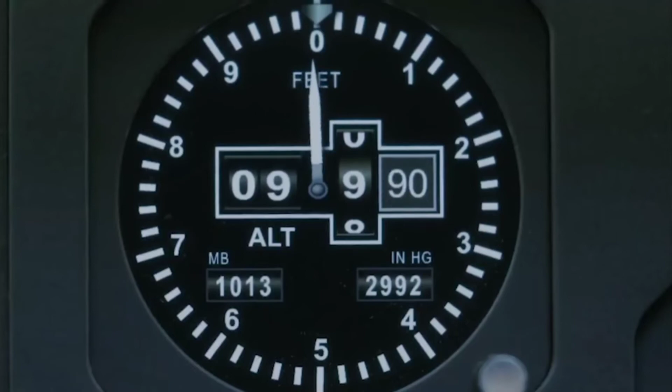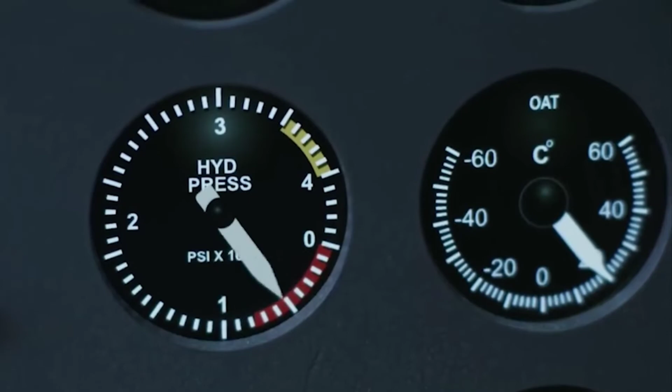Plane has been in the air for 12 minutes. What? What is it? Looks like we lost hydraulics. Dorval approach, this is Propa 420. We've had dual hydraulic failure. Request clearance to return to Dorval.

An incident is an unplanned event that disrupts routine operation in the context of occupational safety and health. An unforeseen, undesirable event that adversely affects the execution of a work, according to OSHA. The severity of the incident varies from near misses to fatalities.

Hydraulic failure is a serious problem because of the impact that it can cause, which is very devastating. The consequences can be exceedingly costly as well as inflict long-term damage and even inflict injury and, at the worst, death. So, it is important to diagnose hydraulic failure in order to determine whether corrective or other actions are required.

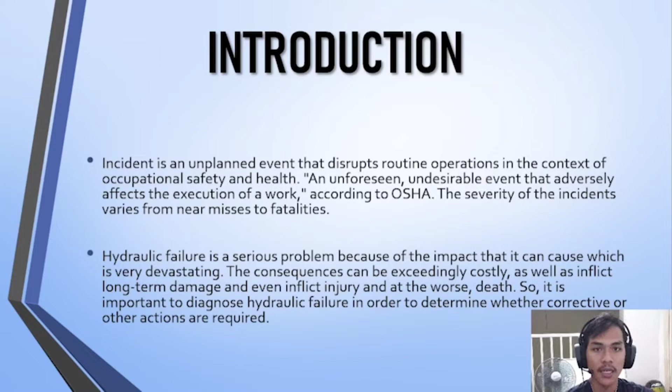Today, I will present about the background of the incident. On 3 May 2020, an Airbus AS350 helicopter N1 WT made an emergency landing at Airglades Airport 2IS. The pilot, the only occupant on board, reported an in-flight hydraulic anomaly and declared an emergency. The pilot subsequently landed at 2IS. The pilot reported no injuries and the helicopter was not substantially damaged.

The flight was conducted under the provisions of Title 14 Code of Federal Regulations Part 91, which began at Fort Lauderdale Executive Airport, FXE, landed at Palm Beach County Park Airport, LNA, and subsequently departed LNA for 2IS.

According to the pilot's written statement of the incident to the Federal Aviation Administration, he reported that upon entering the left downwind for runway 13 at 2IS, the pedals felt rock hard and the HYD2 and SERVO caution lights illuminated on the caution and warning panel. So before I continue explaining the background of the accident, let's explain the meaning of HYD2 and HYD1.

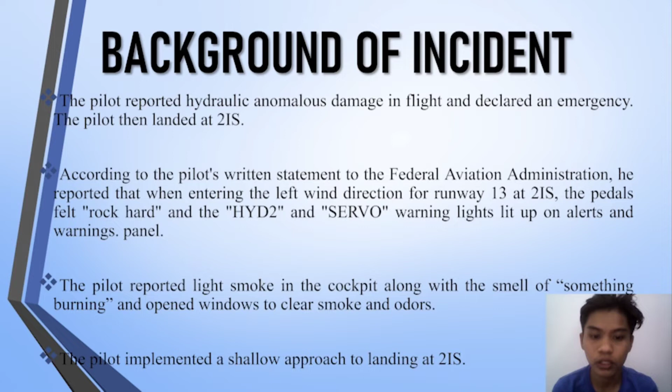So let me continue about the background of the accident. The pilot reported light smoke in the cockpit along with an odor of something burnt and opened the window to clear the smoke and odor. The pilot executed a shallow approach to a run-on landing at 2IS.

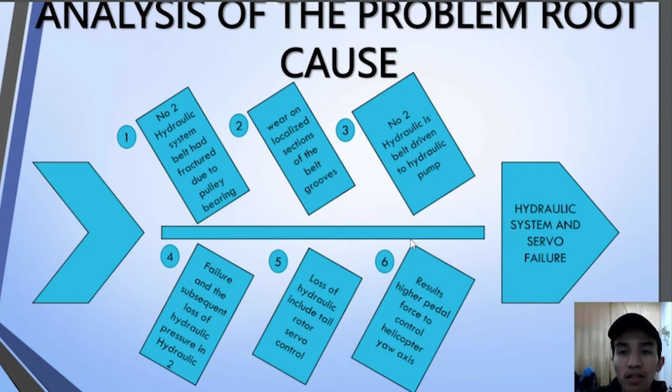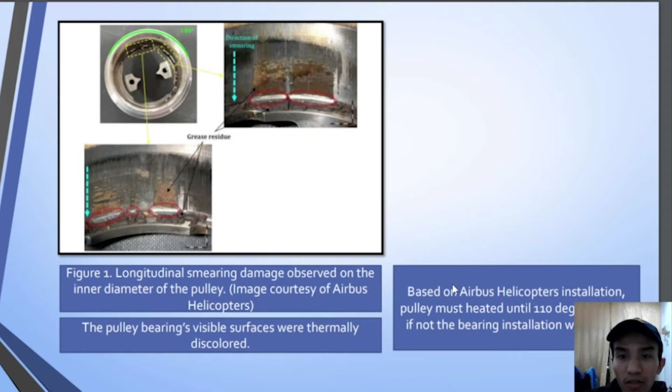Now I'm going to present to you the discussion of this case study. So, the potential problems that might occur. The first one is particulate contamination. Dust, dirt, and debris, such as metal debris, will enter the hydraulic system when the system is not sealed properly. As a result, particulate contamination occurs.

And we know that there is a filter inside every hydraulic system. The function of this filter is to remove the contamination. The filtration of the hydraulic system is critical, so proper filter change intervals and professional procedures are needed to ensure the functionality of the hydraulic system. Particulate contamination can score precision machine parts in the system, and this may lead to the failure of the hydraulic system.

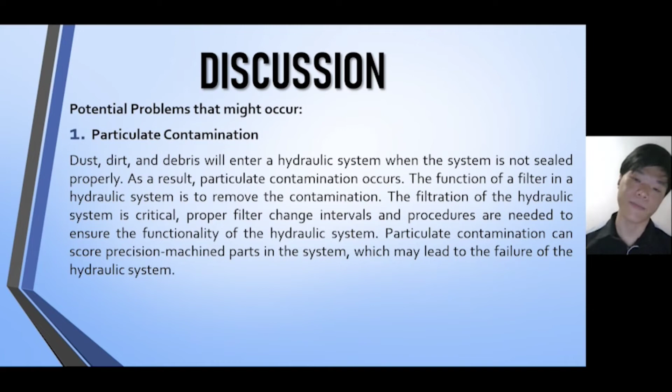The second problem is water contamination. We know that the hydraulic fluid in the hydraulic system plays an important role. When the hydraulic fluid has a milky appearance, it is an indicator of water contamination. Water can enter the hydraulic system when the system is not sealed properly.

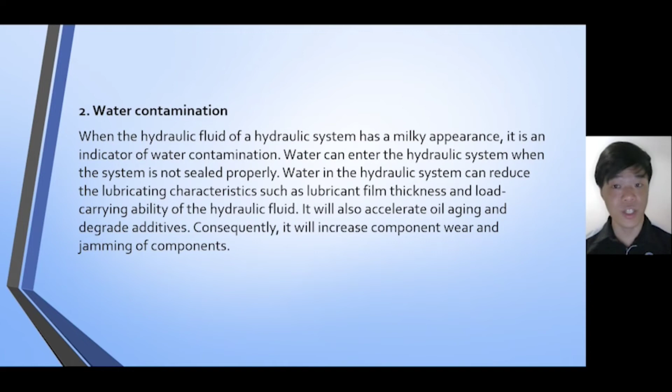Water in the hydraulic system can reduce the lubricating characteristics, such as the lubricant film thickness and load carrying ability of the hydraulic fluid. It will also accelerate oil aging and degrade additives. Consequently, it will increase premature component wear and jamming of the components.

The last one is incorrect hydraulic fluids. Hydraulic fluids serve a variety of purposes in a hydraulic system. They are used to transmit power through the system, lubricate parts within the system, and help conduct generated heat away from the main components. Failure to use the correct hydraulic fluids will reduce the efficiency and performance, and it will also shorten the lifetime of components.

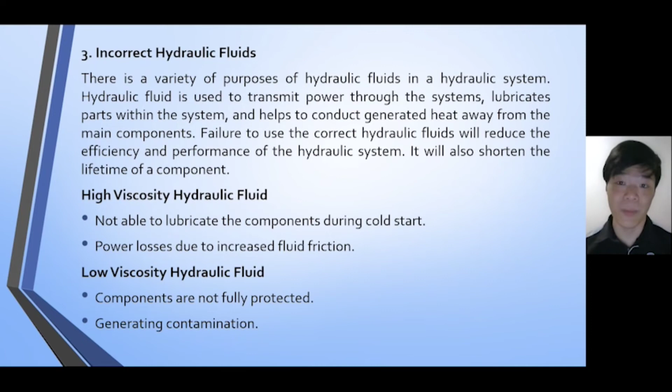If we use a high viscosity hydraulic fluid, it may not be able to lubricate the components during cold start, and power may be lost due to the increased fluid friction. For low viscosity hydraulic fluids, the components are not fully protected, and it will generate contamination such as metal debris. That's all from me.

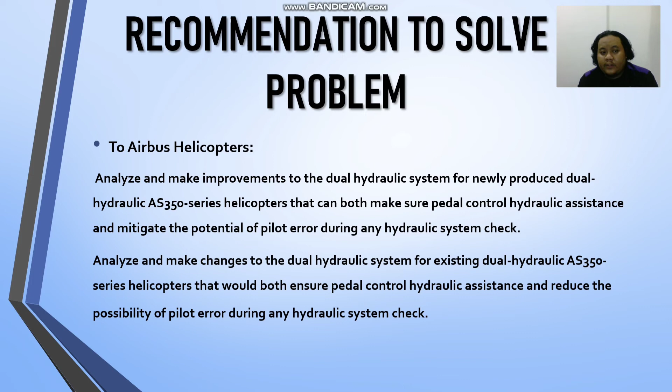Analyze and make changes to the dual hydraulic system for existing dual hydraulic helicopters that will ensure pedal control hydraulic assistance and reduce the possibility of pilot error during the hydraulic system check.

Second, to the Federal Aviation Administration and the European Aviation Safety Agency: require operators of Airbus dual hydraulic helicopters to incorporate the changed dual hydraulic system after completing the action required in the safety recommendation, to ensure pedal control hydraulic assistance and mitigate the possibility of pilot error during any hydraulic system check. The third is to the Association of Critical Care Transport.

Establish a work group in partnership with the Association of Air Medical Services and the Air Medical Operators Association to develop and distribute guidelines for those who want to buy, rent, or contract for helicopters regarding the equipment and systems that will improve the helicopter's crash protection, such as crash resistant fuel systems and energy absorbing seats.

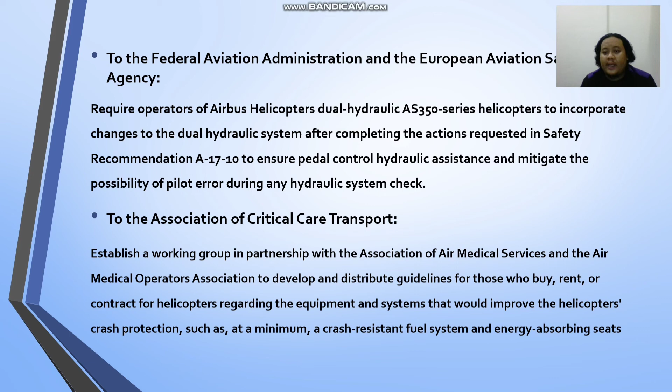And last, to the Federal Aviation Administration. It must prioritize the approval once Airbus Helicopters has completed the development of the retrofit kits incorporating an appropriate crash resistant fuel system into the AS350 B3e and similar design variations.

Issue a special airworthiness information bulletin notifying all owners and operators of the model and similar design variations about the availability of crash resistant fuel system retrofit kits and urging them to install them as soon as possible. It should discuss the helicopter accident circumstances and report in order to encourage helicopter owners and operators to retrofit their helicopters with a crash resistant fuel system.

Take priority for authorization once Airbus Helicopters completes the development of retrofit kits incorporating a crash resistant fuel system into the AS350 B3e and similar design variations.